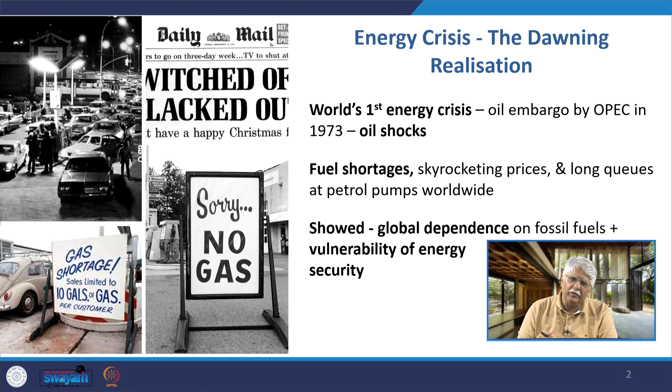I will begin by telling you how this became so important for us in the 21st century. It really began with the energy crisis the world faced for the first time in 1973. There was a dawning realization about the problem of energy. There was an oil embargo by the oil producing countries, the organization called OPEC, and this sent oil shocks all over the world. There were fuel shortages, skyrocketing oil prices, long queues at petrol pumps, showing there is a global dependence on fossil fuels and the vulnerability of energy security.

Then there was the impact of carbon emissions on climate. The damage from carbon emissions began to be understood from the 1960s, but there was strong global recognition in the 1970s to 1980s. Early reports started coming out as early as 1979 with the report Carbon Dioxide and Climate: A Scientific Assessment, the Charney report.

In the 1980s, there were private documents by oil companies like Shell and Exxon, secret at the time, warning about climate change. Then important milestones came about. In 1987, the Brundtland Report came out, which framed sustainable development globally, influencing building policy.

In 1990, the first green building standard certification called BREEAM came out in the UK. BREEAM stands for Building Research Establishment Environmental Assessment Method. It focuses on energy, materials, pollution and health. In 1993, the US Green Building Council, the USGBC, was formed, and the LEED rating system was established in 1998.

Around this time, concepts like life cycle energy and embodied carbon began appearing in research work. Another important milestone in 1997 was the Kyoto Protocol, called COP3, the first binding international agreement to reduce greenhouse gases, and buildings were identified as a major sector for energy reduction or carbon reduction.

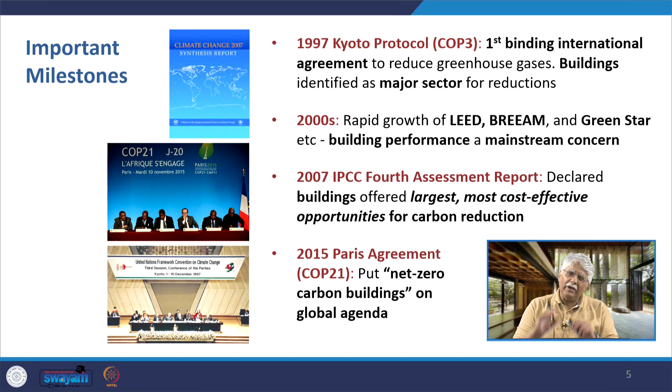The 2015 Paris Agreement, COP21, put net zero carbon buildings on the global agenda. Probably last year, a UN report by the IPCC came out declaring what was called Code Red, stating that global temperature was likely to rise 1.5 degrees Celsius in the next 20 years.

But 1.5 degrees Celsius from what? 1.5 degrees Celsius from the time of the Industrial Revolution. Global temperature would rise 1.5 degrees Celsius above the temperature during the time of the Industrial Revolution. If that happens, there will be irreversible climate change and global warming.

Already we are seeing the impact of tremendous climate change. Literally a climate change catastrophe is happening with extreme heat waves, drought, flooding, melting glaciers, rising sea levels, especially in areas where we never expected before. Floods, for example, in Frankfurt, droughts in areas that did not witness them before, and forest fires are happening.

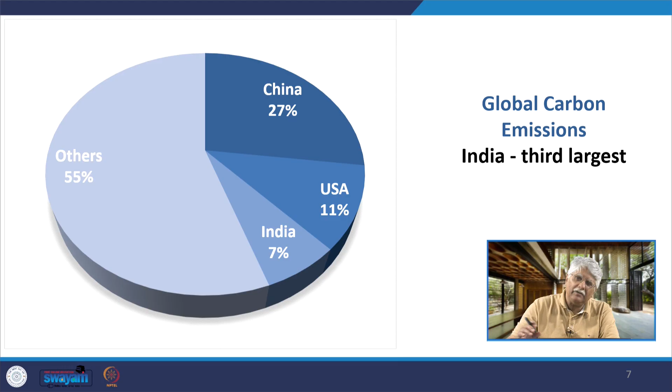As a result, globally there have been caps established on the amount of carbon emissions nations can emit. For India and China, the target for reaching net zero carbon is 2070. That is, by 2070, India is striving to become a net zero carbon nation. Currently, China is at the forefront of global carbon emissions with 27%, the USA at 11%, and India is the third largest carbon emitter with 7%.

Now, when we talk of carbon emissions or energy consumption in buildings, what are we really talking about? We are talking about two things. One is embodied carbon or embodied energy, that is the energy required to manufacture the materials used in construction and to transport them to the site, the overall energy embedded in the materials. The second is operational energy or operational carbon, the energy consumed during the operation of the building.

Data reveals to us that buildings contribute a total of 38% of carbon emissions globally. They are the major contributors, according to the 2020 Global Status Report for Buildings and Construction by the United Nations Environment Programme.

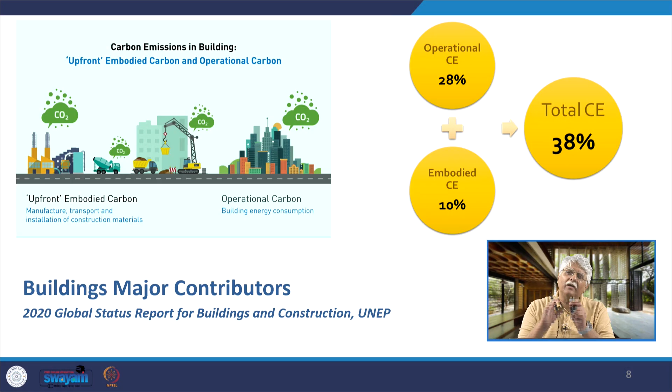That is why it is vital for us to target buildings to lower carbon emissions and lower the energy they consume. Now, in order to understand the difference between a sustainable building and a green building, the concept of sustainability incorporates three principal things: number one is the environment, number two is the economic aspect, and number three is the social aspect, or the people.

All three put together lead to sustainability or sustainable development. But green buildings specifically focus on the environmental aspect of sustainability. That is the difference between being sustainable and being green. There has been a lot of impetus to make green buildings, and now we are also moving towards more sustainability, meaning the social and economic aspects are also becoming important.

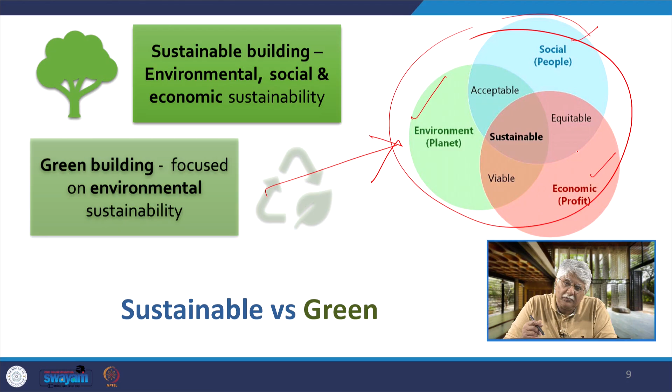When we look at the Sustainable Development Goals that were set up in 2015 by the United Nations General Assembly, they were intended to be achieved by 2030. Out of these SDGs, there are 9 that have a direct impact from green buildings.

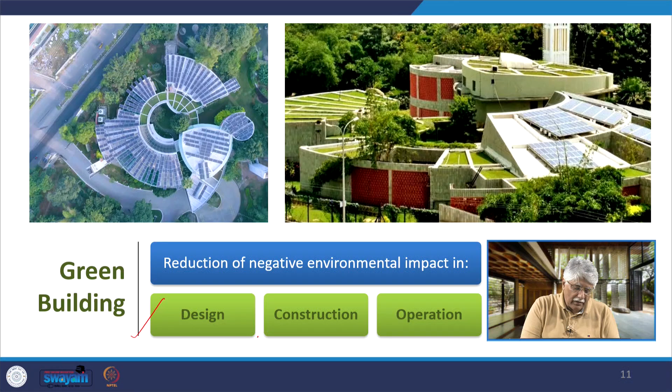So what is a green building? I will give you very simple definitions; you can go and read the detailed definitions later. A green building is the reduction of negative environmental impact through the design, construction, and operation of a building.

When we talk of bioclimatic design, there are some top rated green buildings in India. The one we will look at is the CII-Godrej building in Hyderabad by Karan Grover. Then there is the T-Zed Homes in Bangalore, the Suzlon One Earth campus by Christopher Benninger in 2009, Infinity Benchmark in Kolkata, the Rajiv Gandhi International Airport in Hyderabad, and the ITC Green Center in Gurgaon in 2004.

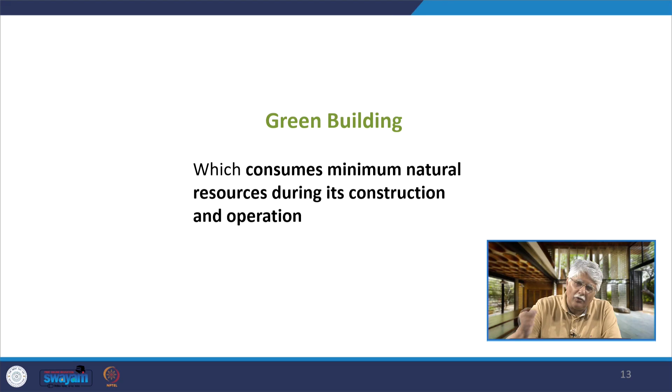A green building is one that consumes the minimum natural resources during its construction and operation. There is increasing efficiency with which buildings use resources, energy, water and materials, while reducing the building's impact on human health and environment through better siting, design, construction, operation and maintenance, and finally the demolition and removal of the building.

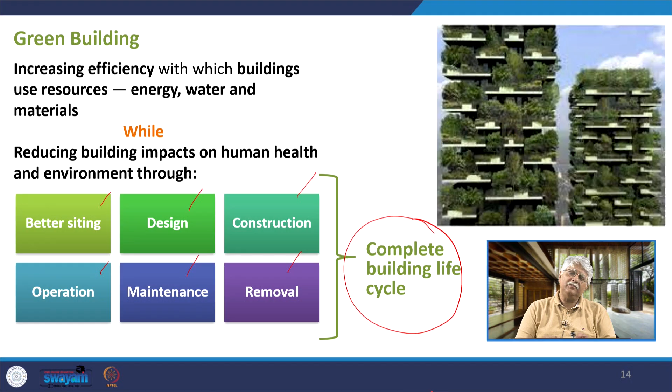The entire building life cycle is part of the model of a green building. So when we talk of life cycle energy requirement, we look at two things: embodied energy, which is the energy needed to quarry, manufacture and transport materials used in building construction, and operating energy, which is the energy used by occupants for heating, cooling, ventilating, lighting, operating equipment, etc., in the building.

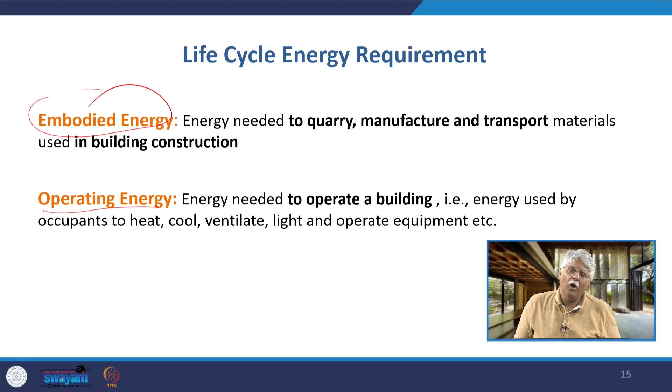How do you reduce operating energy? Today in this presentation we are not looking at the embodied energy or embodied carbon aspect, though more energy efficient, low carbon materials also need to be used as part of the overall green building concept. But when we talk of operating energy, two things are important.

One is energy saving. How do you save energy? There are passive and active means to save energy in a building: improving insulation, automated ventilation controls as the active part, lighting control using natural light, lighting control using motion detection sensors, high efficiency light fixtures, and rooftop planting, which are called roof gardens today. Through all this we are trying to save energy.

The second part is energy making, through, for example, photovoltaic generation using solar PV panels. So on one side we are saving energy, lowering the amount the building consumes. On the other side we are making energy. The energy that the building still consumes is provided by the building itself through things like photovoltaic panels or even geothermal energy.

Many other means are being explored today. So both these aspects can work together to lower the energy consumption of a building, or the energy that it takes from the city grid.

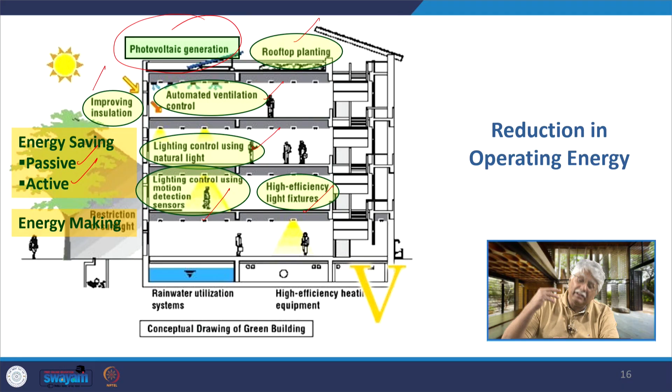Why make buildings green? Not only is it important because of the critical issue of lowering carbon emissions, but studies also reveal that productivity gains up to 16% happen with green buildings, because they reduce absenteeism and improve work quality and overall indoor environmental quality. Therefore, there are environmental, economic and social benefits for all building stakeholders.

So here we are actually looking at the very essence of sustainability.

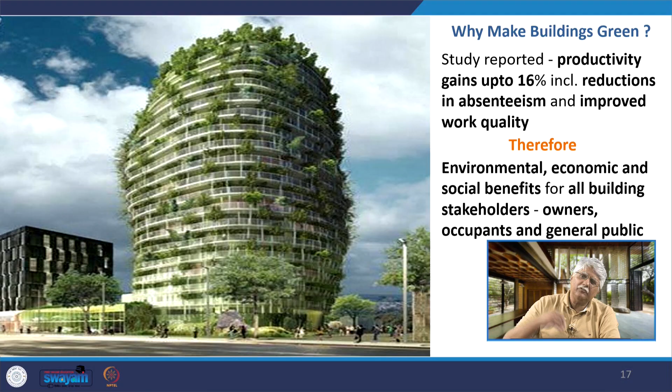Though it is a green building, it is also impacting economic and social aspects because there is less absenteeism, the indoor environment is better, people find it easier to work. Economically that benefits the companies or corporations. So owners, occupants, general public, everybody benefits with these green buildings.

Green building should create delight when entered, serenity and health when occupied, and a regret when departed. This is a statement from the book called Natural Capitalism.

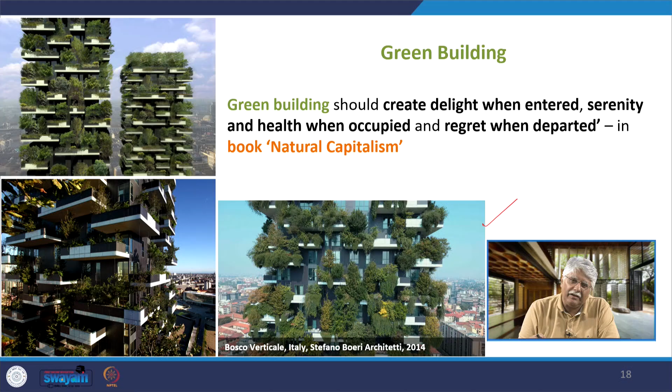The building you are seeing in this slide is the Bosco Verticale, the vertical forest in Italy by Stefano Boeri Architetti in 2014. There is another building, the One Central Park in Australia by Jean Nouvel, another green building from 2014.

Today there are a variety of green projects coming up globally: residential, exhibition centers, hospitals, airports, laboratories, IT parks, corporate offices, government buildings - so many building typologies in which green buildings are being made.

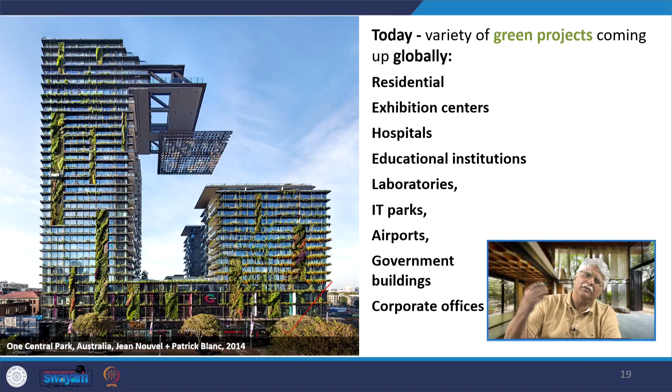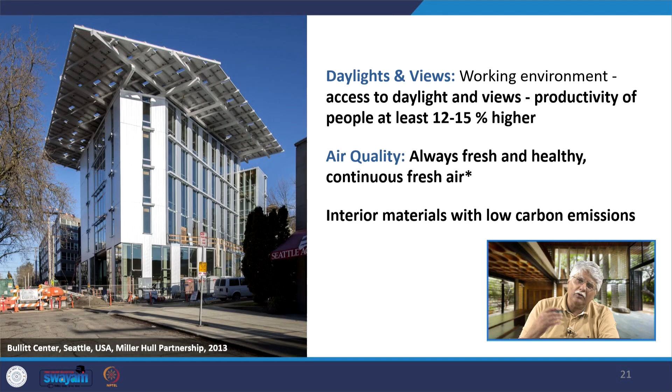There is better daylight and views, working environment improves, access to daylight and views is there, productivity of the people goes up, air quality improves, it is fresh and healthy. Interior materials are also used in a way that they have low carbon emissions.

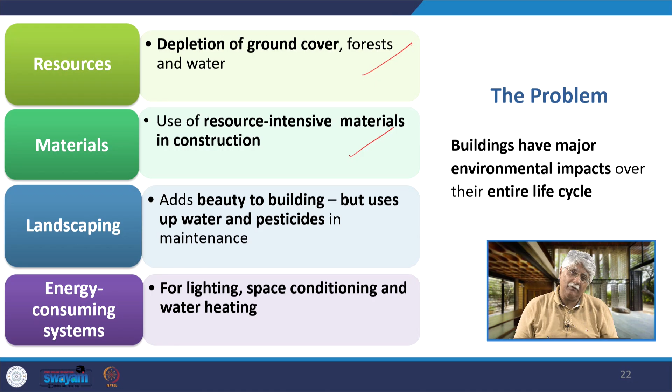In landscaping, though they add beauty to the building, we use water and pesticides for the maintenance of the landscape. We use energy consuming systems within the building. We use high-tech controls, building management systems that add intelligence to the building but require a lot of energy.

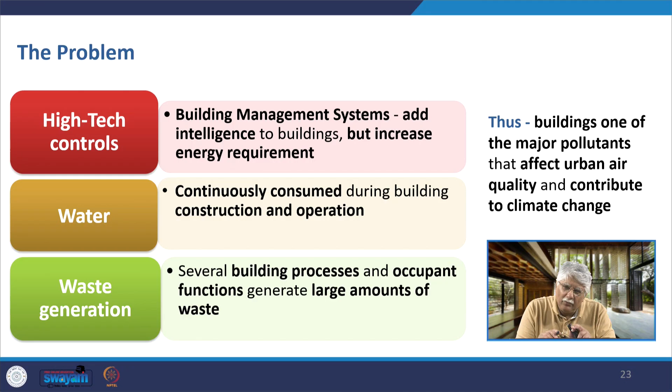Water is continuously consumed during building construction as well as operation, and waste generation - several building processes and occupant functions generate large amounts of waste. Thus, buildings are one of the major pollutants that affect urban air quality and contribute to climate change.

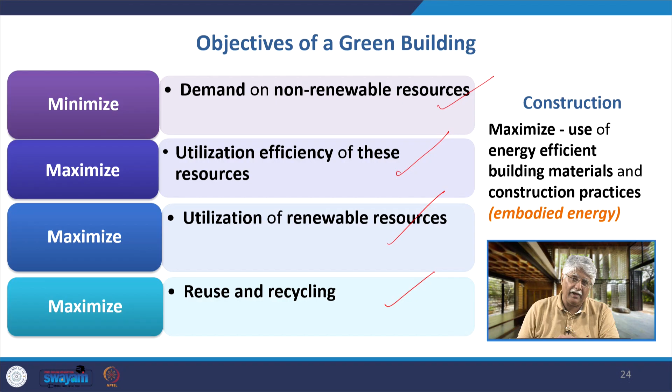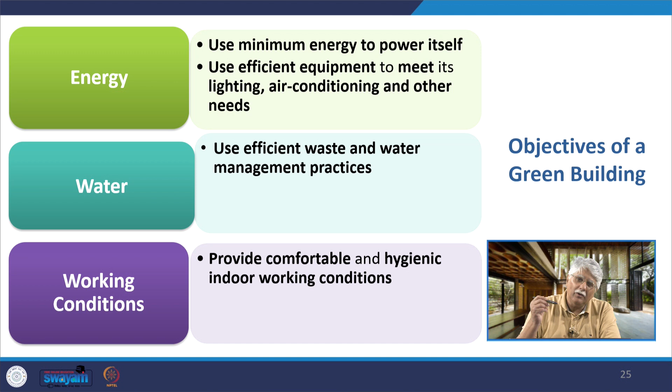All these concepts are evolving even further today. The objective is energy - minimum energy to power the building, energy efficient equipment for lighting, air conditioning etc. Water efficiency - use efficient waste and water management practices. Working conditions - provide comfortable, hygienic indoor working conditions.

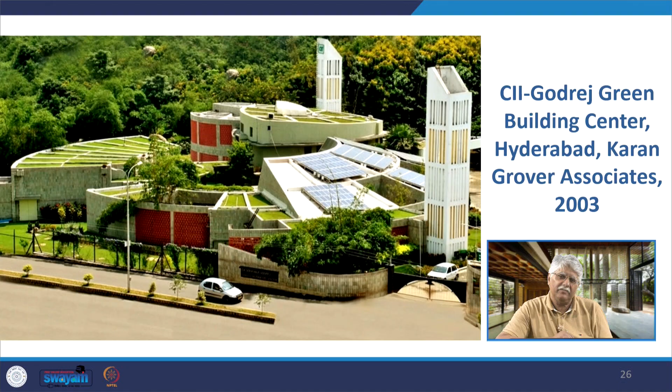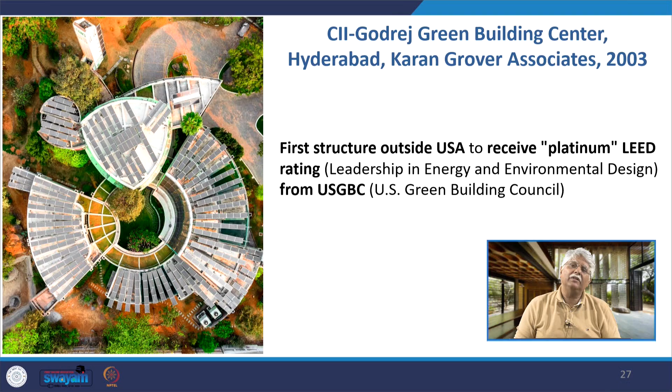So we come to the CII-Godrej Green Building Center in Hyderabad. Why is this an important study? Not only for Indian architecture but global architecture, because this is the first structure outside of the USA to receive a platinum LEED rating. In this presentation, I am not giving you the entire description of the LEED and GRIHA green building certification - you can read it up - but the LEED rating as given earlier by the US GBC, now we have also the Indian part of the Green Building Council called the IGBC, Indian Green Building Council.

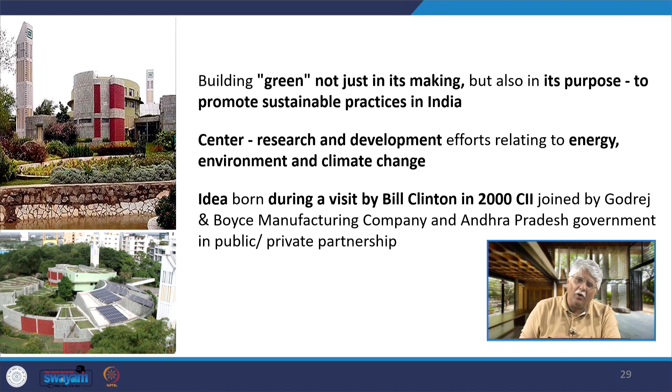The CII-Godrej building in construction combines both ancient practices with modern architecture, reaffirming the applicability of traditional architectural knowledge in today's notions of sustainability. The building is green not just in its making but also in its purpose to promote sustainable practices in India. The center is for research and development efforts related to energy, environment and climate change, and the idea was born during a visit by the then President of America, Bill Clinton, in 2000.

Karan Grover Associates in Baroda are the architects behind it, and developed a design scheme to respond to both the cultural and the environmental context. The building was to be a showcase for energy efficient, eco-friendly architecture, an integration of age-old practices with sustainable practices using modern technologies.

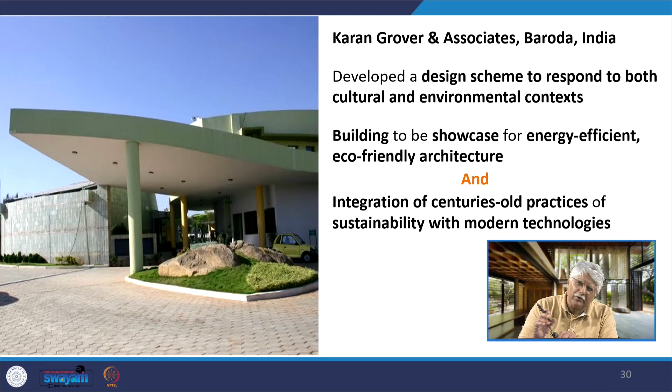The building is 20,000 square feet of space with a circulation scheme that encourages interaction. It's got an introverted courtyard - inside yet outside - leading to traditional gathering spaces. They're ideal for bringing in natural light into the building and for climate control in this hot region. All enclosed spaces are coupled with smaller open courts which encircle the larger courtyard.

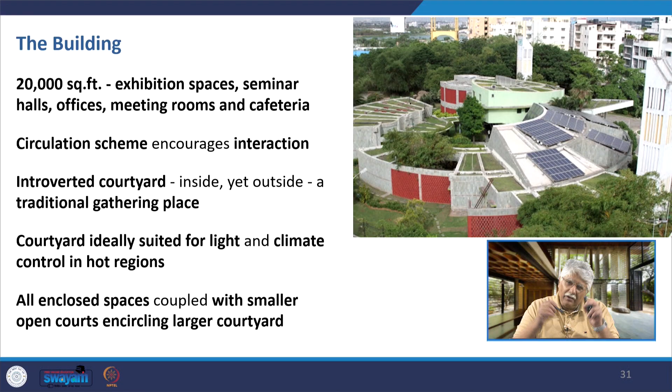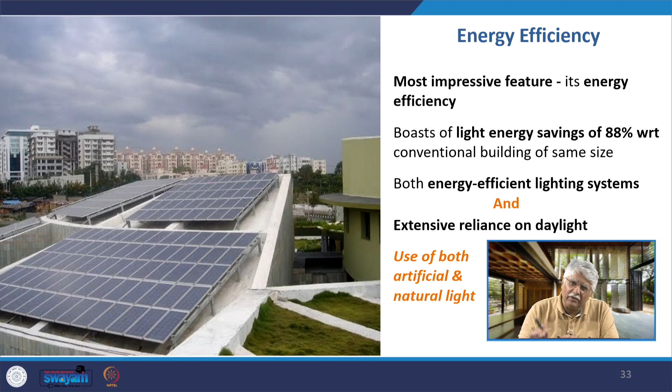The large central courtyard is key to the sustainability success. Energy efficiency is the most important feature, boasting light energy savings of 88% with respect to a conventional building of the same size, through both energy efficient lighting systems and extensive reliance on daylight. Cool north light is brought into the building and washes the interior spaces, with the courtyards acting as light wells, illuminating the adjacent work areas.

When light is insufficient, sensors trigger energy efficient electric lights. There are also dimmers that automatically control illumination levels, turning lights off when unnecessary, and occupancy sensors that prevent lights from being switched on at unoccupied workstations.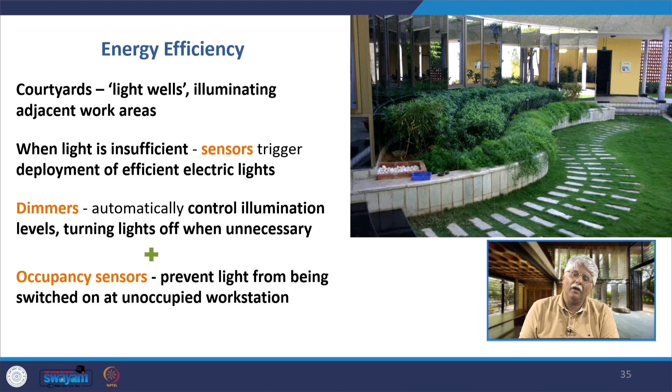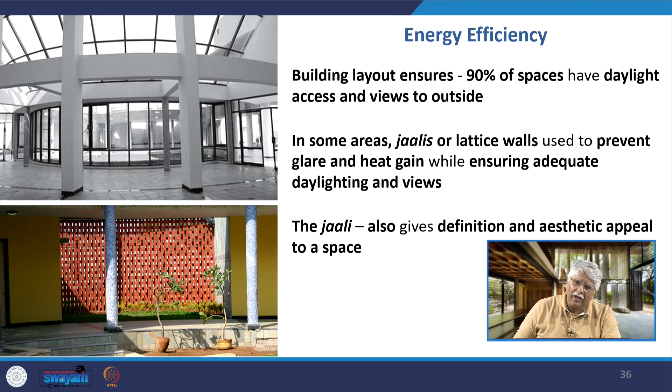Remember this building was made much earlier, in 2003. Since then, much more development has taken place in green building or energy efficient design. Far more new strategies are now implemented, but we look at it as an important landmark in green building design in India. The layout ensures 90% of spaces have natural light access and outside views. In some areas, jaalis are used to prevent glare and heat gain while ensuring adequate daylighting and views. The jaali also gives aesthetic appeal to the space.

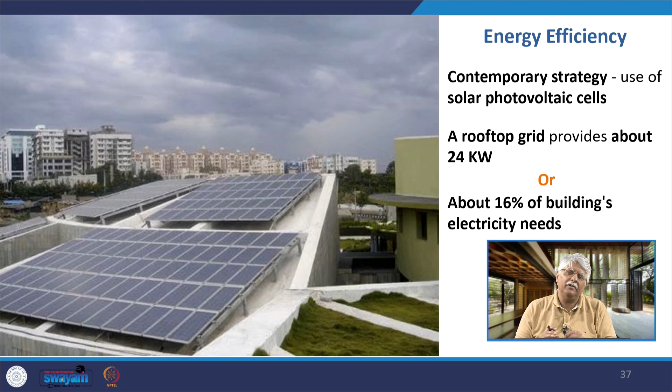A contemporary strategy for energy efficiency is the use of solar photovoltaic cells. There is a rooftop grid that provides about 24 kilowatts, with approximately 16% of the building's electricity needs met through the solar PV panels.

Another traditional method from the Middle East used here is these two wind towers. These wind towers catch air at a height and cool it as it passes down the tower. That cooled air is then pumped into the HVAC system or air handling unit, cooled by up to 8 degrees Celsius, bringing a substantial reduction in the air conditioning load. The roof itself is heavily insulated, reducing the overall cooling load.

To repeat, the hot air from the top is pulled into the tower, and as it comes down, it is pre-cooled within the tower, and this cooled air is fed into the air handling unit.

So what happens? For example, if the outside temperature is 45 degrees, the air conditioner has to bring that down to about 26 degrees Celsius within the building — approximately a 19 degree drop. But because of this system, that 19 degrees becomes just about 11 degrees Celsius, tremendously lowering the cooling load of the building.

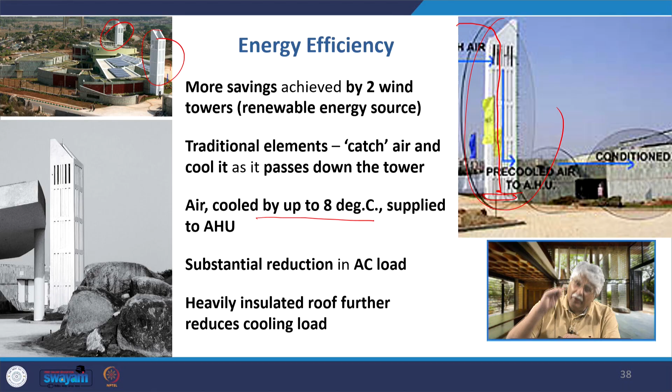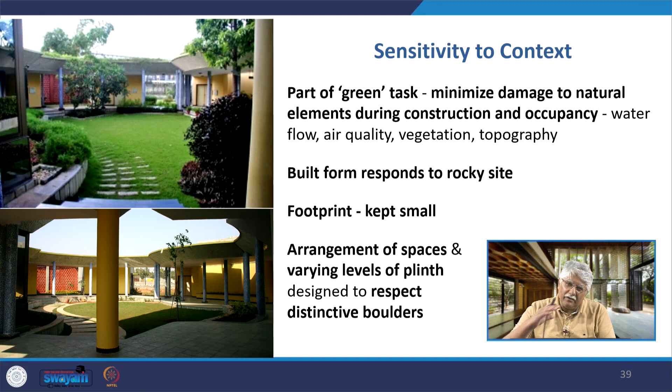There is also sensitivity to context. Part of the green task is to minimize damage to natural elements during construction and occupancy — water flow, air quality, vegetation, and topography are all considered. The building form responds to a rocky site; the footprint is kept small, and the arrangement of spaces with varying plinth levels respects the distinctive boulders, keeping the site's topography as intact as possible.

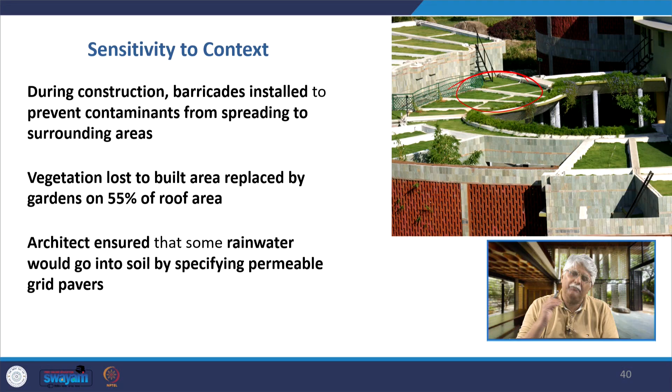During construction, barricades were installed to prevent contaminants from spreading to surrounding areas. Vegetation lost to the built area was replaced by rooftop green spaces or roof gardens, up to 55%. The architect ensured rainwater would go into the soil by specifying permeable grid pavers, with remaining rainwater following the existing flow pattern of the site and collected in a water pond.

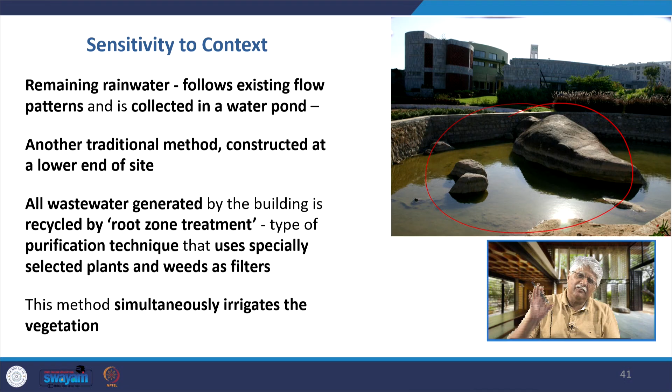Another traditional method is that it is constructed at the lower end of the site. All wastewater generated by the building is recycled through root zone treatment, a purification technique using specially selected plants and weeds as filters. This method simultaneously irrigates the vegetation, and treated water is also directed to the pond and used for domestic purposes.

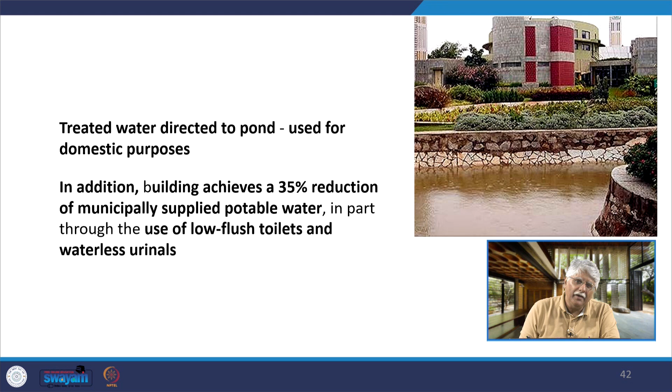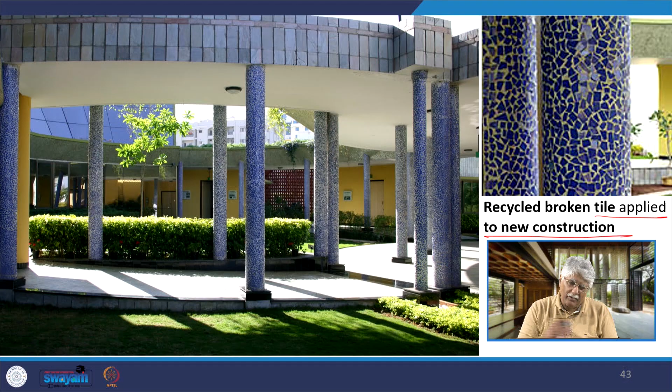The building achieves a 35% reduction in municipally supplied potable water, partly through low flush toilets and waterless urinals. Another aspect: broken tiles from construction are reused and applied on columns as trencadís — I've already discussed this technique in the works of Gaudí — the trencadís using broken tiles.

The sensitivity to context extends to how occupant behavior is controlled, as building occupants are encouraged to minimize their reliance on fossil fuel based transportation. The building is located near a public transport station, so people can use public transport to come to work. Bicycle riders are treated preferentially.

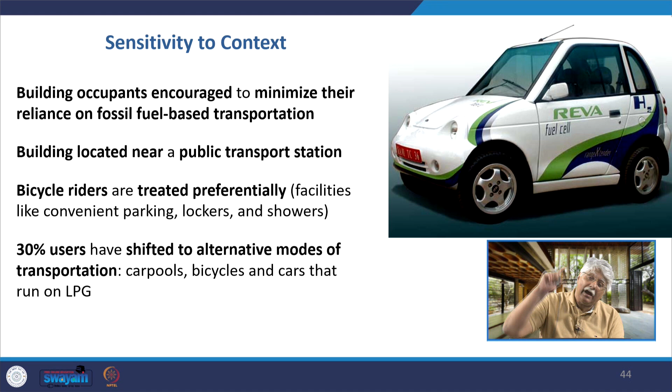They are provided facilities like convenient parking, lockers and showers. 30% of users have shifted to alternative modes of transportation like carpools, bicycles and cars that run on LPG. This was around 2003. They were also encouraged, or rather the center bought locally available, locally made electricity driven cars called REVA, in the hope that employees will buy alternate energy power cars in the future. Now this is an old story, because today EV cars are becoming very, very important even in our country. All over the world we are moving towards a situation where most of our vehicles will be EV vehicles.

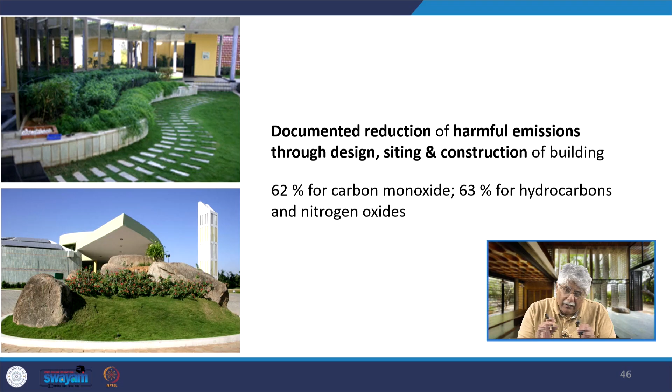Documented reduction of harmful emissions through design, siting and construction indicate at least 62% reduction in carbon monoxide, 63% reduction in hydrocarbons and nitrogen oxides through this building. This demonstrates that traditional knowledge is valid today and can be used in conjunction with modern architecture to achieve these levels of sustainable design. It's earned a very high LEED rating of 56 credits, a platinum rating, which urges us not to turn our backs to history in our quest for modernity.

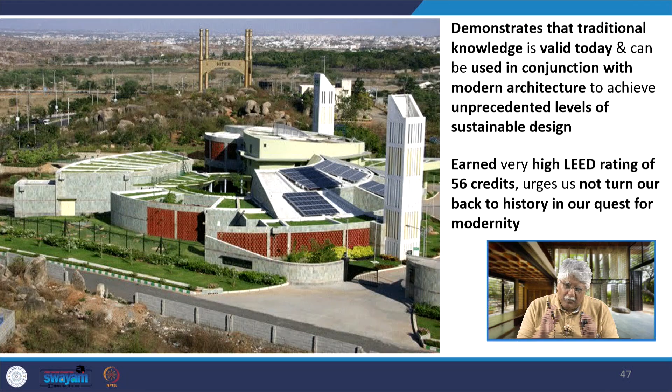So this building in 2003 formed a benchmark of green building design, but like I said, a lot of other developments have happened over time. Let's again look at a benchmark building of 2006, the Hearst Tower in New York by Norman Foster, a green high-tech building. The earlier building that was there was by William Randolph Hearst, an Art Deco structure originally designed by Joseph Urban, and Foster designed his iconic tower above it while keeping intact the 6-story base.

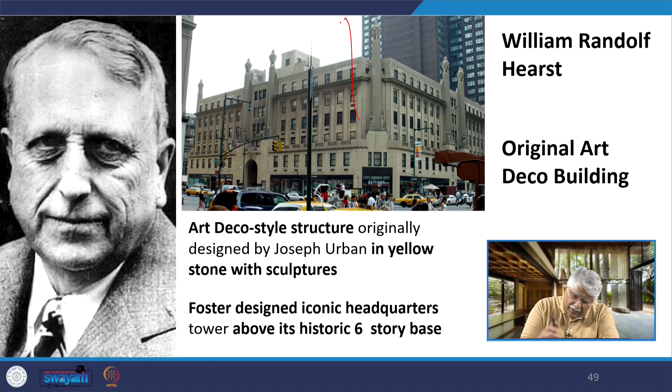This is the before renovation picture, and this is the after renovation picture. It's a 46-story building, with 80,000 square meters of office space, rising above the old building. It's a pioneer in environmental sustainability, the first commercial office building to receive the Gold LEED certified rating for core and shell interiors in New York City.

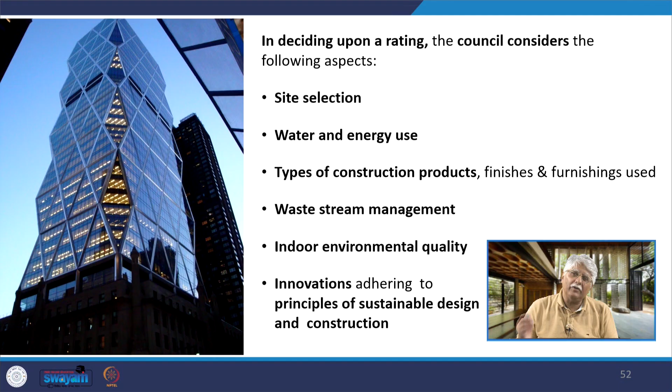In deciding upon the rating, the council considers aspects like site selection, water and energy use, indoor environmental quality, and the type of construction products used, etc. Over 90% of the structural steel used in this building has come from recycled material, and about 85% of the original structure can be recycled for future use.

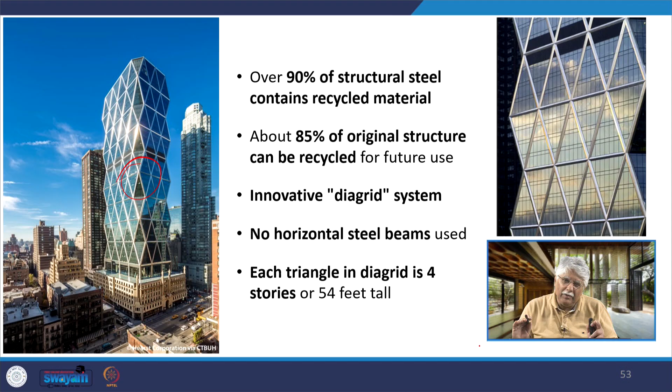It has an innovative diagrid system. We have already seen this in the Gherkin, or the Swiss Re building, also by Norman Foster in London. There are no horizontal steel beams used. Each triangle in the diagrid is 4 stories or 54 feet tall. The diagrid frame was not originally thought of as a way to enhance the tower's green building status, but what happened was...

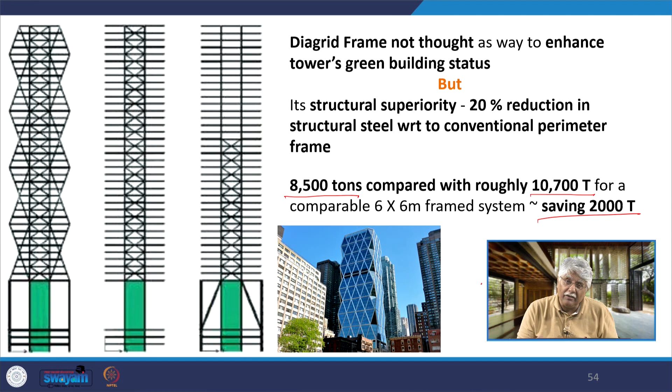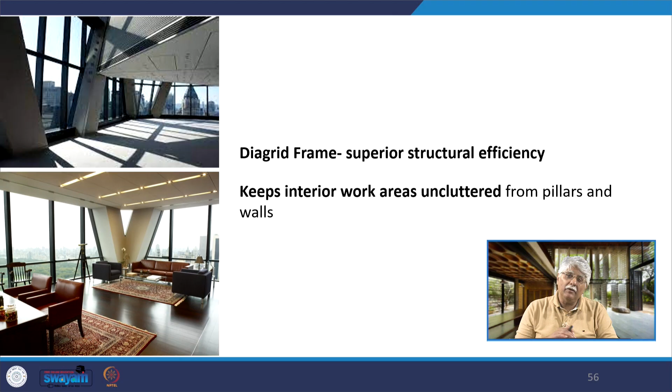the structural superiority of the diagrid reduced the overall steel required for the structure by 20%. This building uses 8,500 tons as compared to roughly 10,700 tons for a comparable building of this size, saving 2,000 tons of steel, a major contribution towards this green building status. This is how the form of the building evolved, the diagrid frame, which also has superior structural efficiency. For example, it keeps the interior work areas uncluttered from pillars and walls.

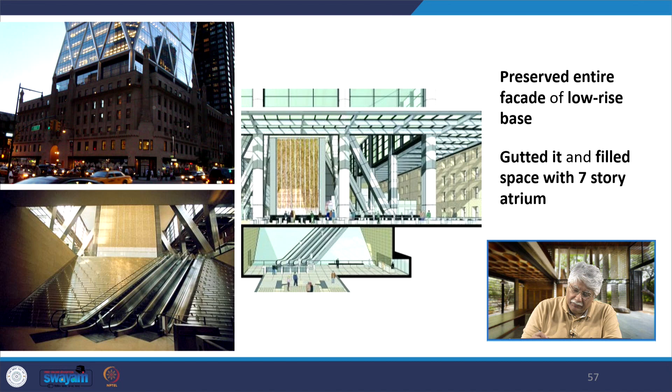Now, the entire facade of the low-rise base has been preserved. It was gutted and filled with a 7-story atrium. The lobby with atrium occupies the entire floor plate, and then the 6 stories of the old building rise from the lobby, housing the main elevator lobby, cafeteria, auditorium, etc. There is a transparent skirt of glazing that you see here, which brings in natural light into this space.

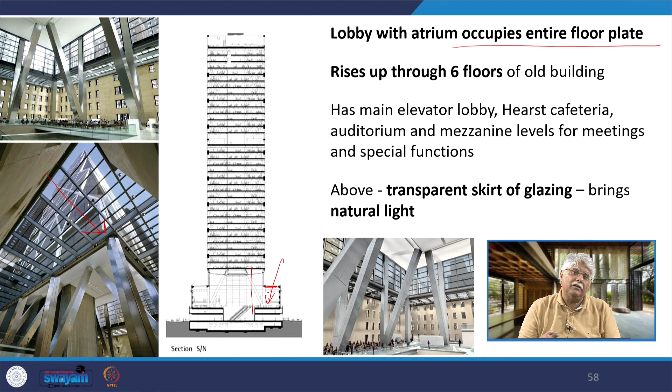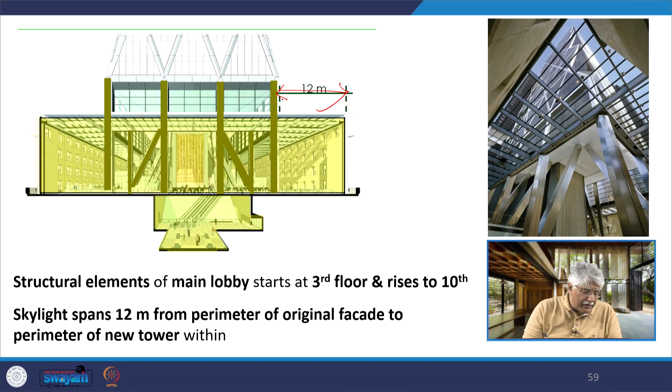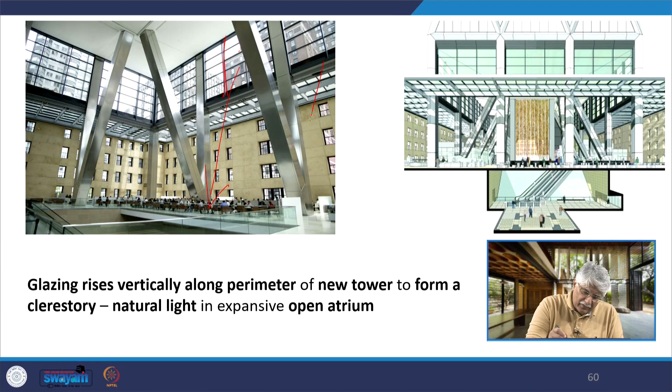The structural elements of the main lobby start at the 3rd floor and rise up to the 10th floor. There is 12 meters of glazing provided as a skylight, which brings natural light into the building. Along with that, there is glazing also rising like a clerestory window on the perimeter of the new tower, and this also brings in natural light. So, from the skylight and the clerestory window, natural light floods into the 7-story atrium space.

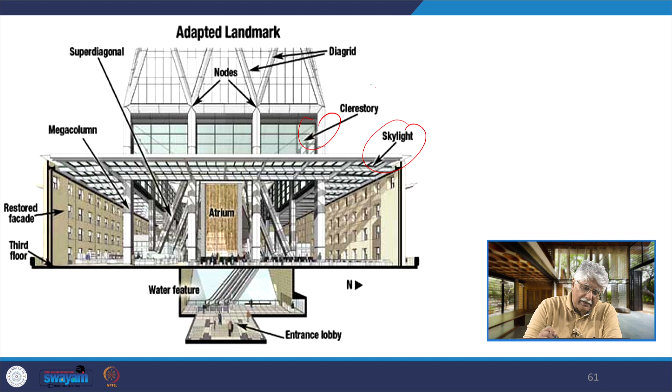This is how the atrium is formed, the clerestory, the skylight, the diagrid, and the overall structure. The lobby is a celebratory communal space, a town square, and there is also a 3-story waterfall provided in the atrium called the Icefall, creating a sense of calm in this monumental scale.

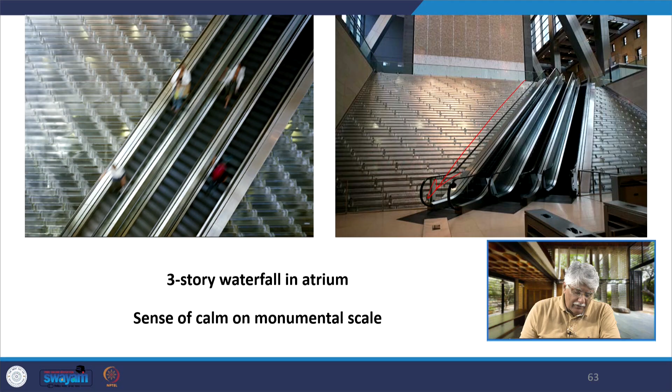It is the nation's largest sustainable water feature, a 3-story high stepped, slanted waterfall with angled escalators. There is a half-inch surface of water and some 15,000 gallons per hour of water flowing, built of 50 tons of glass.

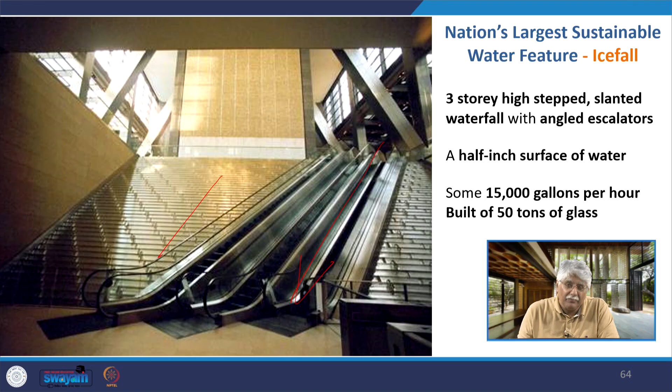The waterfall helps control the climate in the building by providing humidity and by cooling the large atrium in summer, thus reducing the energy cost of the building.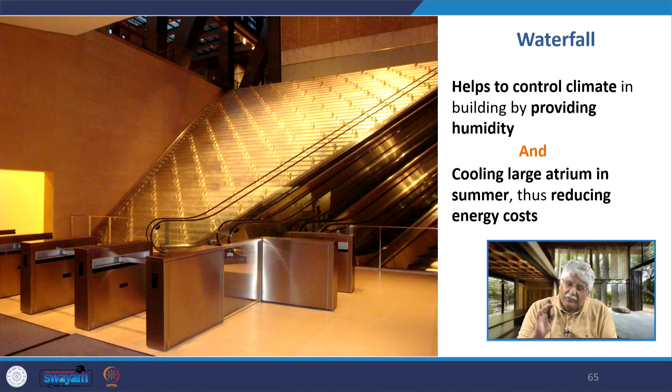The environmental strategies used in this building include rainwater harvesting, low emissivity glass facade, daylight sensors, activity sensors, high efficiency heating and air conditioning. They utilize outside air for cooling and ventilation up to 75% of the year, with minimum internal walls that maximize daylight penetration in the building.

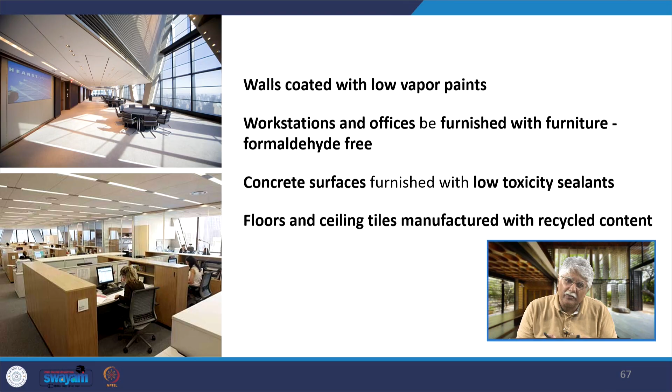85% of the original structure can be recycled, with an energy efficiency of 22% with respect to a standard office building. Walls are coated with low vapor paints. Workstations and offices are furnished with formaldehyde-free furniture. Concrete surfaces are furnished with low toxicity sealants. Floors and ceiling tiles are manufactured with recycled material.

It got the International High Rise Award in 2008 as a Sustainable Office, the first green building in New York to receive the Gold LEED rating of core and shell, an iconic building yet very environmentally responsive tower. With regard to energy efficiency, Norman Foster has been at the forefront of making buildings that bring about energy efficiency.

Then we have the CH2 building in Australia. We'll quickly rush through its design. This is the first building in Australia to get the 6-star rating from the Green Building Council of Australia.

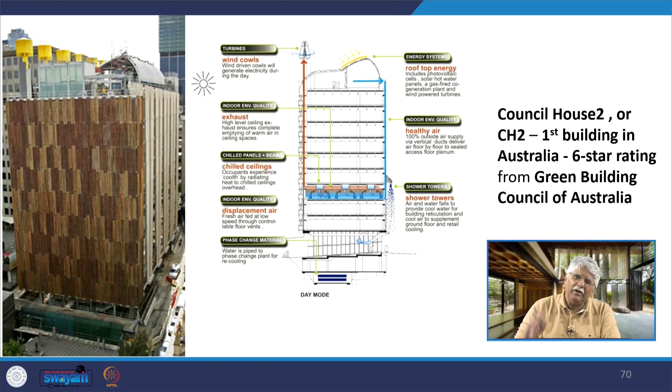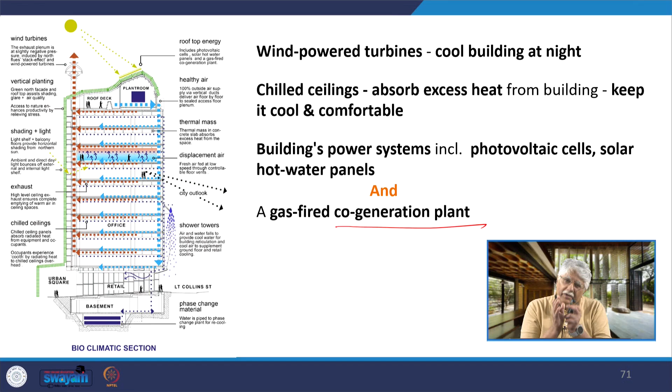There are wind powered turbines that cool the building at night, and chilled ceilings are used. The building power system includes photovoltaic cells, solar hot water panels, and a gas powered cogeneration plant. A cogeneration plant is one where the fuel used to produce electricity also has its heat reused for other purposes within the building.

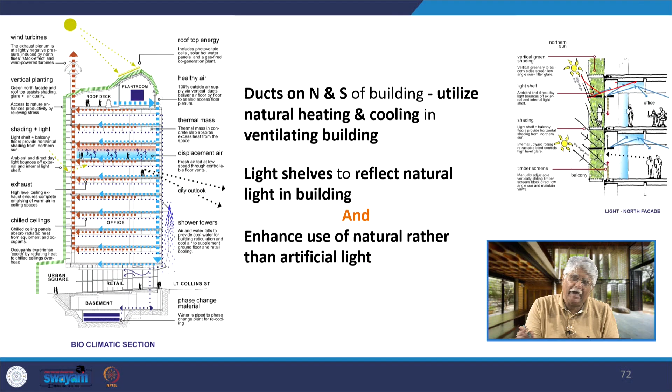The ducts are on the north and south of the building, utilizing natural heating and cooling for ventilating the building. There are light shelves provided that bounce light into the building, increasing the overall natural light in the interior.

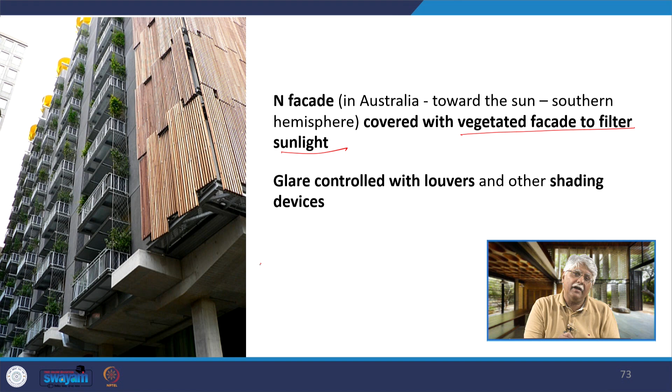The north facade gets maximum light since Australia is in the southern hemisphere - in our case that would be the south facade in the northern hemisphere. Therefore it is covered with a vegetated facade to filter sunlight, and glare is controlled with louvers and other shading devices. Recycled timber louvers are used and controlled by photovoltaic cells.

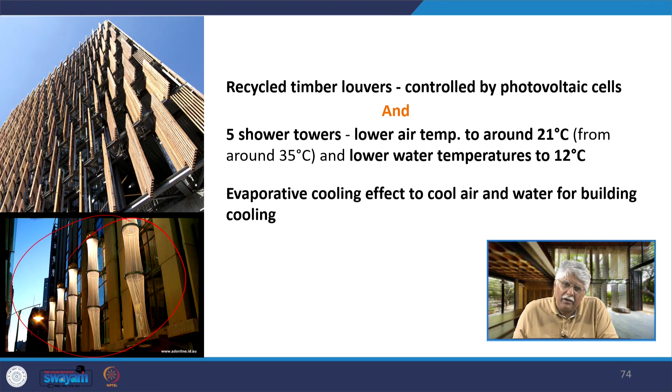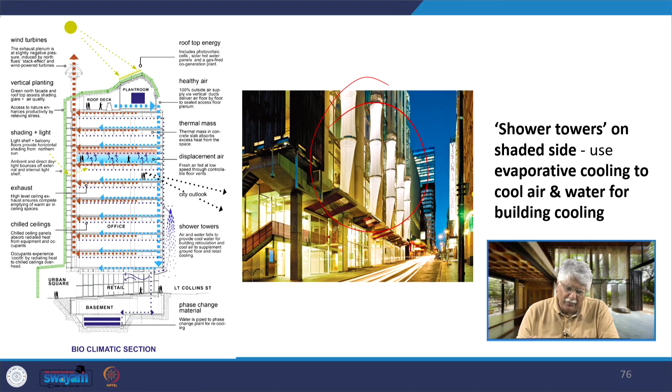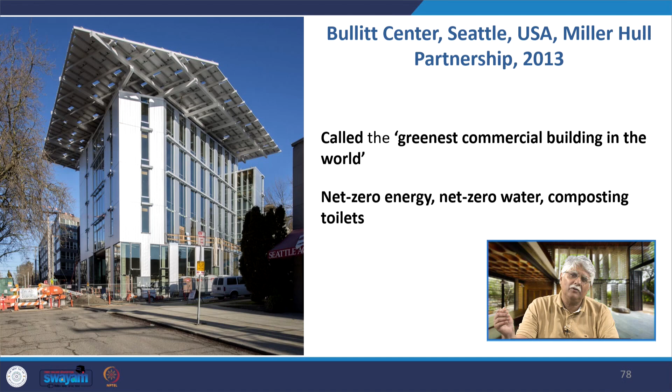Some examples of contemporary green buildings show how fast we have moved in the way green buildings are designed today, like the Bullitt Center in Seattle, called the greenest commercial building in the world, with net zero energy, net zero water, and composting toilets. The Bosco Verticale, the vertical forest we just saw, has twin residential towers with 900 plus trees and 20,000 plants integrated into the facade, improving air quality, reducing the heat island effect, and creating urban biodiversity.

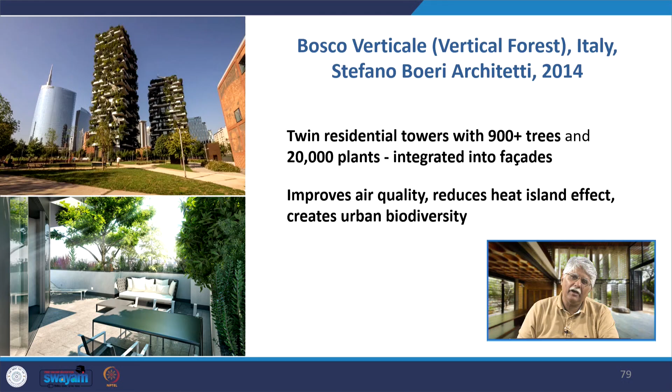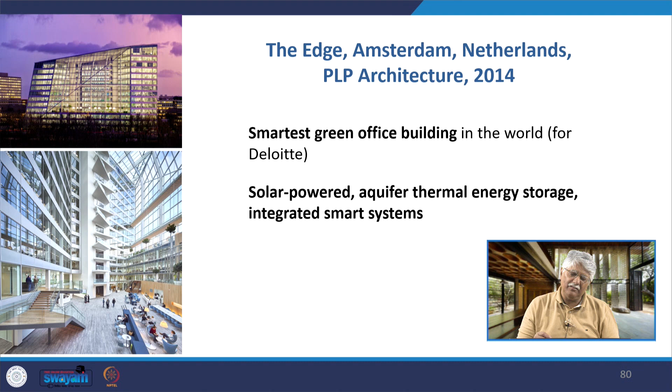The Edge in Amsterdam, considered the smartest green office building in the world, built for the Deloitte company, features solar powered aquifer thermal energy storage and integrated smart systems. If you recall a few lectures back, I talked a little more in length about this building.

Then there is the Parkroyal Collection in Pickering, Singapore, a hotel designed as a garden with lush green sky terraces covering 200% of site area in greenery. Rainwater harvesting and natural ventilation strategies have been used.

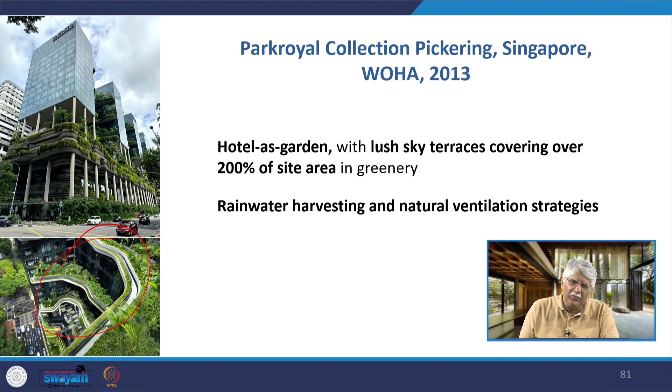Thus we find that green buildings have come a long way today, and far more strategies are being employed. A lot of research is being done to make our buildings more and more sustainable, more and more low carbon, more and more green. Thank you.